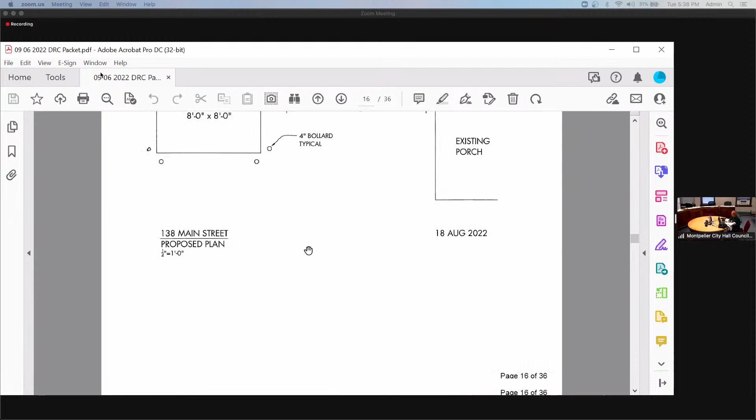So there you go. So where we had gotten the pellet silo permitted before was next to the existing porch. The street is off to the right of the building. This is at the back of the building, so the front of the building's to the right as well. And so this just kind of shields the silo better from the street. And it also actually makes it easier to use the access doors where the boiler is going to be. So can you go to the side elevation? Yeah, see the pellet silo was blocking those access doors. We made those a little bit larger. It's kind of immaterial, not much larger. So what was previously approved was the silo kind of below the shed and only half of the roof being raised.

Sandy, what will go in that space now? Cars park in there. It's really just paved area. Is it paved? Yeah, it's not a designated parking space.

And you're raising the full boiler shed roof now, right? Or not? Right, if you go back to the drawing below that in the handout. So now the whole, we had originally asked that the left side be left as is, which is about 18 inches lower.

The other thing that is noticeable is we were allowed to drop the silo down. So this silo is a good 4 feet lower than we had it before, which will also help mask it. Is there a pipe that goes underground? It's actually about a foot. It's at the bottom of that square, which is called the udder. Sorry, if you go back down, Meredith. Oh, here? Yeah, at the bottom of that, it goes left into the building, enters the building, and then rises up to the boiler level. It's a vacuum tube and a pellet tube.

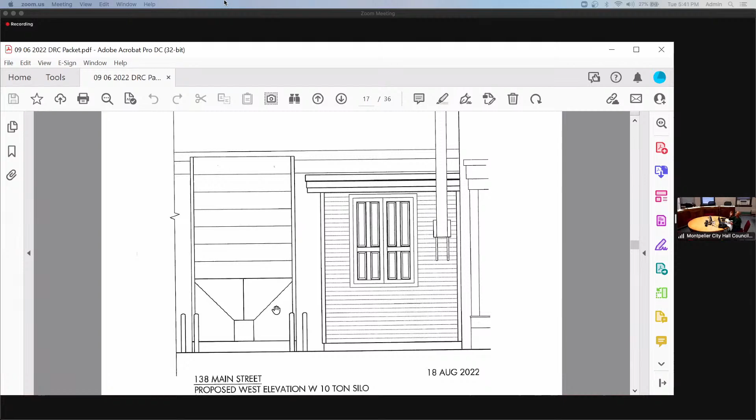But right where Meredith's hand is, even a little bit lower than that, that's about where the flood level is, right around the top of the bollards. So it was really no problem to let the silo be below flood level. Anyways, I'm not asking to drop it, but we are asking to move it to the back, and we're asking permission to raise the rest of that roof up. Yeah.

Yeah, if you had approved a taller silo and then they came in and said they could drop it, that's not something I would send back to you guys, because clearly it would be less noticeable if it's shorter. Right. But we have to redo, and we give them the site plan for moving the silo to the rear. Anyway, there's a different setback. And that was significant enough to bring it to you guys, and raising the whole boiler shed roof. I mean, there's other stuff going on here too anyway, so it made sense. Yeah.

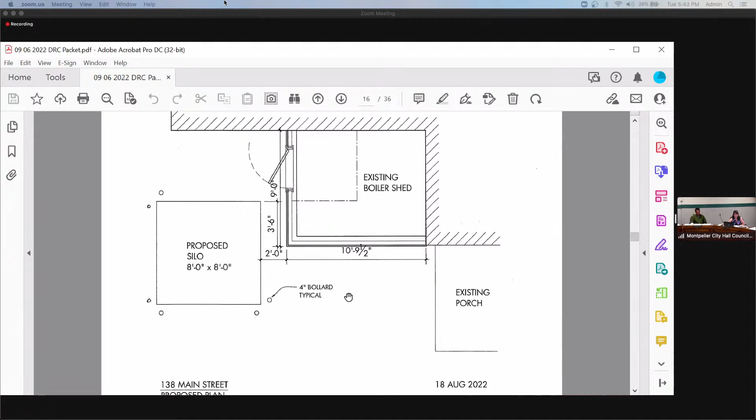And again, how much are you anticipating raising the shed roof? 18 inches. So it would have the exact same shape that it does now. It just would go up 18 inches. Originally, we were only asking to raise half of it, but it's still lower than everything else. It's still behind the main building completely. And it doesn't go up above the main building. Not at all. So on the right, on that drawing that's on the screen, you can see the adjacent porch. The porch is higher than the shed roof.

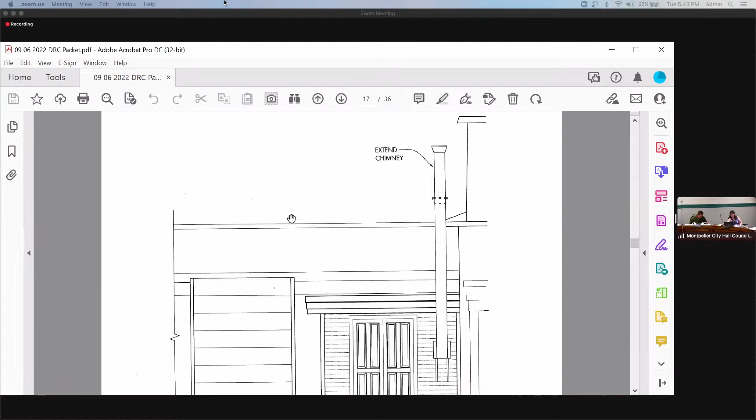Okay. And then where the hand is now is the top of the mansard roof, and the bottom of the mansard roof with a significant cornice is that one. Yeah, where the hand is now. And then there's the porch. So it's all well below the mass of the building. And this line back here is the rear sort of additions. Yeah, what we call the low mansard roof, which is still a one-story building. It's higher than the silo too. Yeah.

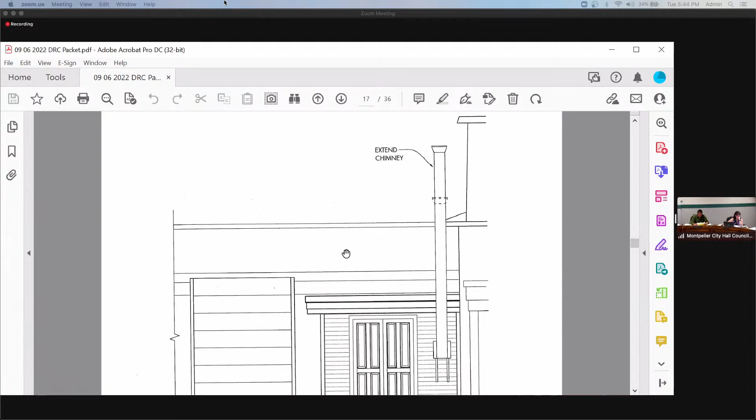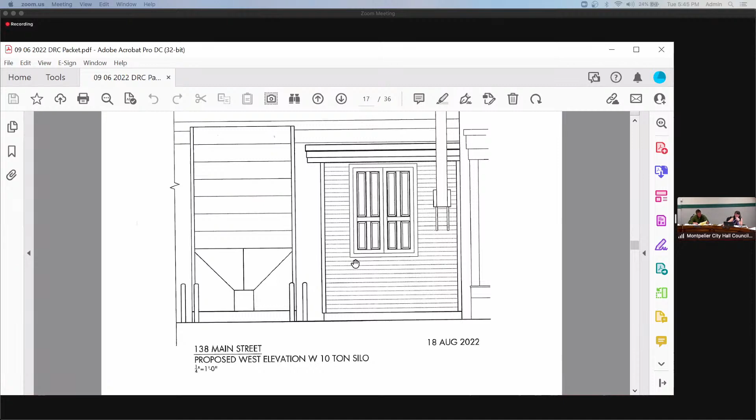Once I know what the next topic is, I'll scroll to it. It's the windows, but they may have questions or discussion about other parts. Anybody have any questions on the other portions of the silo and the shed? Okay. Next on the list is your windows. It is, and that's the biggest request for tonight.

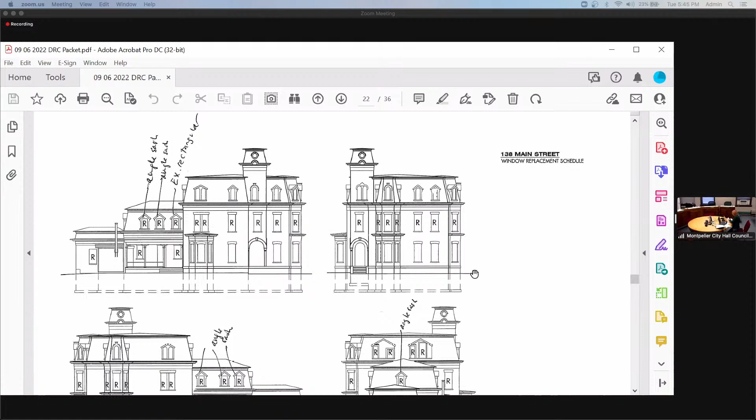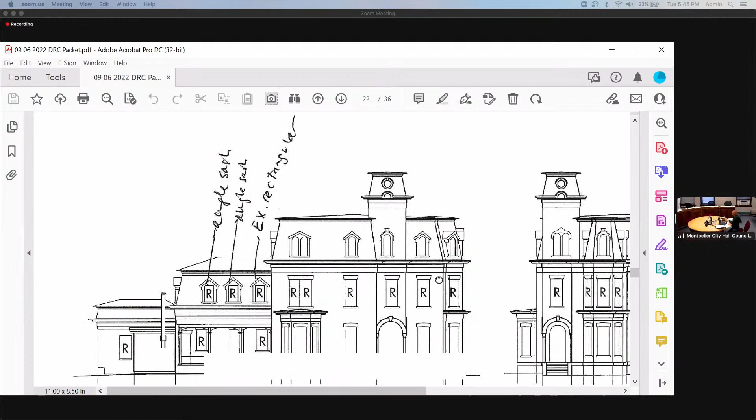So there are, how many windows? There's so many windows on this building. I think you said you're replacing something like 37. We're proposing to change out 37 of them, but those are the rectangular ones and ones in the back. I think there are more than 60 windows in the whole building, and there may be closer to 70 or 80. I have an inventory of them, but my papers got spread out, so I don't have them right now. But oh well. Anyways, you can see on the elevations that the attempt is to only replace windows that are rectangular and in the back of the building.

So the truly character-defining windows that have round tops and face the road and are visible from either angle as you approach the building, they would be restored. And we have a contract already started; we're in queue to get them restored. I think it'll be a 3-year plan, but we're already doing that. And they all have interior storms already, except for a couple on the back.

But the owner is making a concentrated effort to give back to the community where they can really have an impact. The rectangular windows we're able to replace pretty much in kind. We're suggesting using Ultrex for the outside, but it's a narrow profile, so it will look almost exactly like the original windows. And they were 1/1, so that's not an issue.

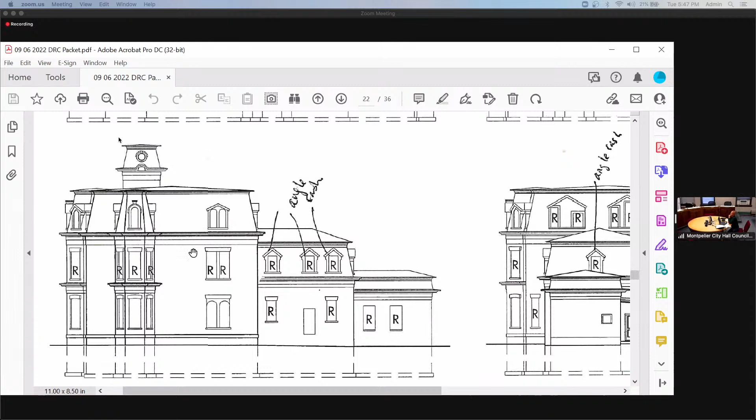So I'm just talking first because I think these are the most important windows on the front and the 2 public sides of the building. Those are the only ones that would be replaced, the ones with an R on them. So all of the first level are segmental arches, and the upper ones are actually semicircles, semi-arched windows. Those would all be restored. At the back, those are basically impossible to see from the public realm.

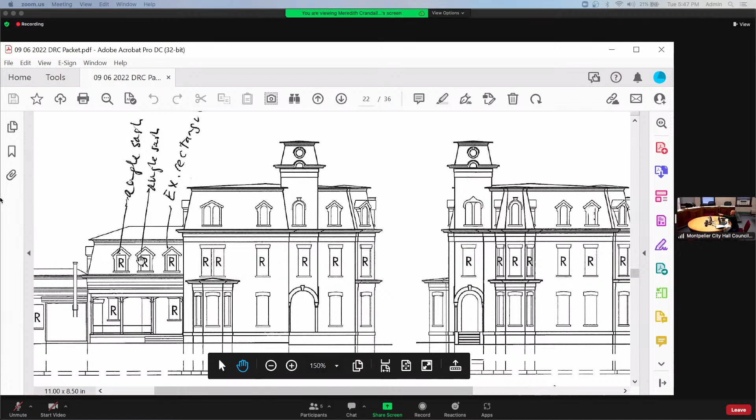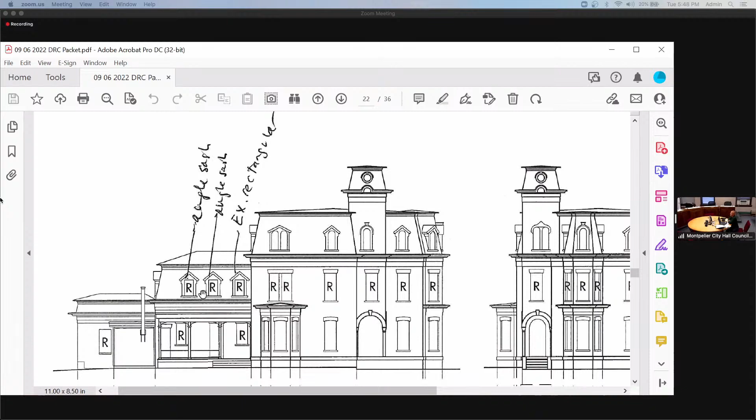So your packet does have a photo from the inside of one of these angle tops. There's, let's see, 1, 2. There are 2 on the rear, and then 3 on that side. So it's a total of 6. 6 are angle top now, but the rest are all rectangular. And the picture that you're looking for, this one is the second floor window, yeah, that one. It gives you an idea of how bad the condition is of the windows. That's from the inside. You can't even see the hole in the window. The glass has a hole this big in it.

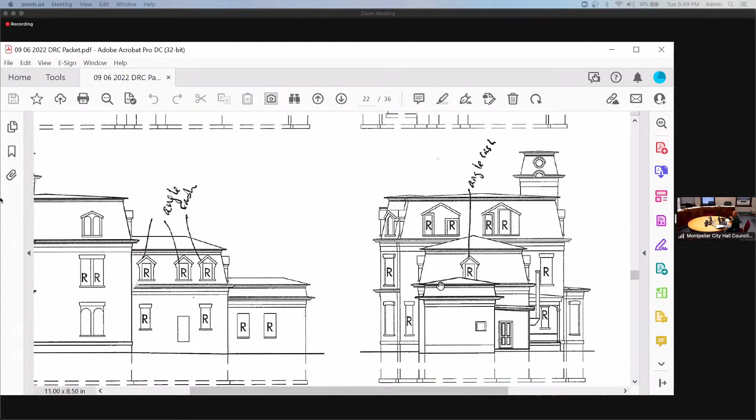So most of those windows have outside storms, which are already rectangular topped. They've been that way for probably 40 years. And the idea would be just to take the storms off and fill in discreetly, following the example of the one that was always built as a rectangular. Can you go back to the west side, Meredith? Yep, where the porch is. So that window right there is a bathroom window, and it was always a rectangular window. From the inside, it's a flat dormer ceiling. And it's clear, if you look carefully at the outside, that it was always rectangular. So we would copy that one around the back of the building and just fill in the triangle with the rectangles. Again, you can't see it from School Street.

On the back is the river, and on the east side of the building is a big tree. So you can't see them from anywhere. Fill in the triangle with what? Wood trim, to look like a wood panel. You could even leave it recessed when you replace the other window, against the stops. You could put a wood panel against the stops where the glass was and then insulate it on the interior.

The bathroom one that is existing has a horizontal piece of black trim that matches the two coming down. And then the triangle, that's the tympanum, this one, right? Yes, that's the picture. The tympanum is painted green, not the same, and you can see the recess up there. You can just see the small corner of the recessed panel. And that's what we're planning to do, so we're all on the same page there.

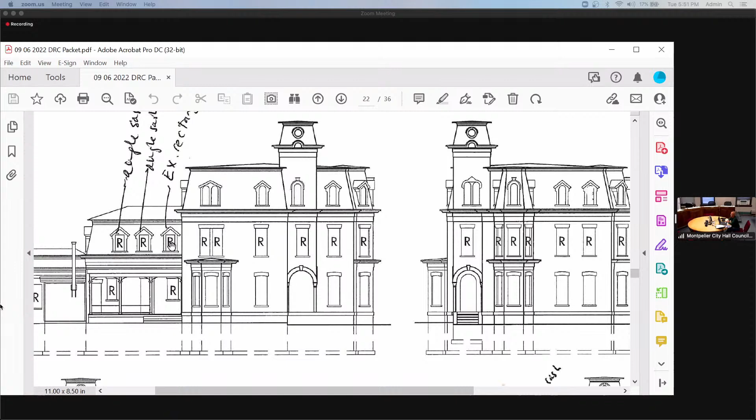But it's just prohibitively expensive to replace them with angle top pieces. And those windows need to be operable. They shouldn't just be fixed. So for a lot of reasons, it made sense to try to replace them.

If I could go on, if you go to the back, do you mind scrolling down, Meredith? Yep, I'm just gonna stop share for a second so I can scroll a little faster. And I'll share again. Which page do you want me to go to? You were on it, actually. Oh, sorry, I thought you went to another page. It's all right. Let me go back. It would give people vertigo if you scroll too quickly.

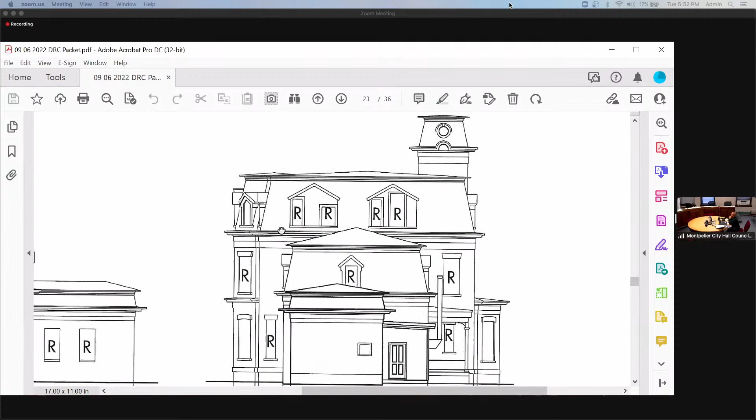So if you go down just a little to the next row of drawings, there's the back of the building, and see on the third floor, there are the three windows, and the far right one is a tiny door. So those windows, both the historic preservation consultant and I believe are not original to the building. We actually don't even think those dormers are original to the building. We don't know where they came from, but you can see in this picture that they are very random.

And one of them has muntins in it. It seemed like they used salvage when they made those windows. They are crazy inefficient, just shaking. One doesn't even have a storm. Basically, they have socks trying to shim them, hold them tight. And then the far right on the third floor is a door that is very small. It's like 2 feet by 6 foot something. It's 2 lights wide and 5 high, but we could replace it with just a single light. That seemed to be better. Again, we don't think it's original. None of the hardware on the door matches the rest of the hardware in the building.

Was the door meant to be an egress? It can't be an egress because it's only 2 feet wide. It would count as an egress window, but not an egress door. Is there an additional egress from the third floor? Well, that's why the whole sprinkler issue is in a separate department right now. Basically, the building cannot get a fire escape, so there's no way to do it. So, suffice it to say, it's not an egress door, but the idea is to improve it so it actually is airtight and can continue to be used. It's used now, as there's a little roof deck up there that's not shown that the tenant has access to.

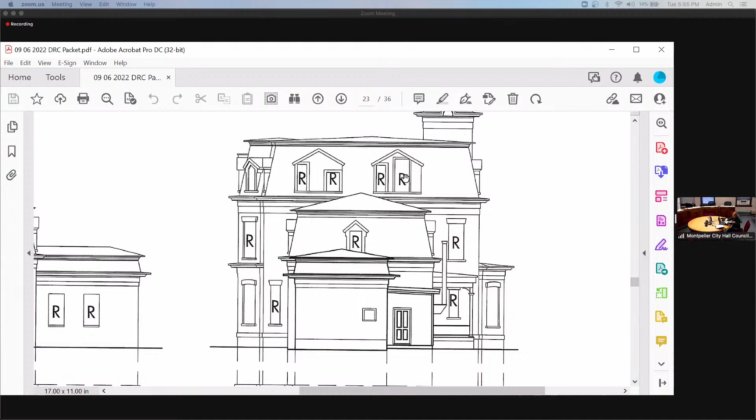I didn't know if, rather than do a 1/1 double hung, you could do a casement window. Oh, it's actually a door with hinges and doorknob. It's 2 feet wide and 6 foot something tall. Oh, okay. Now you're going to replace that with a window? No, replace it with another door. We just got a custom door ordered. Okay. So that was the door referred to as the 37 windows plus one door. And I'm just trying to figure out exactly the size; it's a tiny, tiny door. Does the replacement door have glass in it? Yeah, it would be a single light door. Basically full glass, single light. Kind of in keeping with the rest of the windows up there, that would be 1/1s.

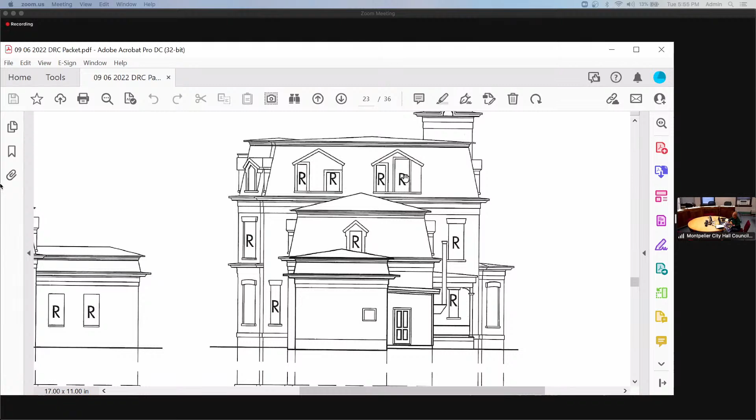And I'm sorry I don't have a better picture of it, but it is that hard to find. You can't get to it. You can't see it from the ground. Hold on one second. But if you go back up, you can see the balcony. Yep. And that's where the door is, but you can see how it's basically impossible to see it. And that balcony doesn't go to a set of stairs? No, it doesn't. It's just a deck. It's not an egress.

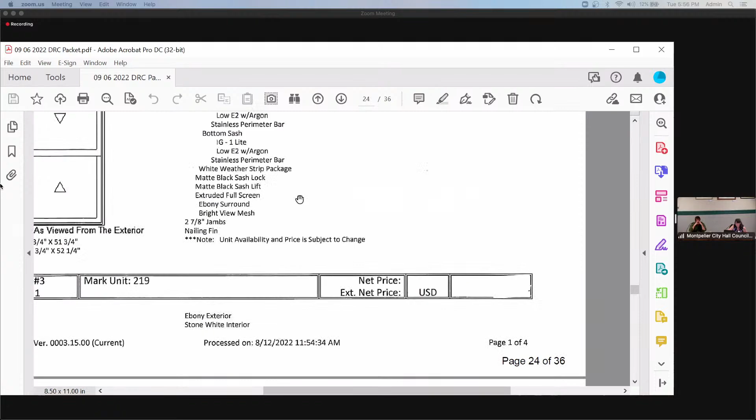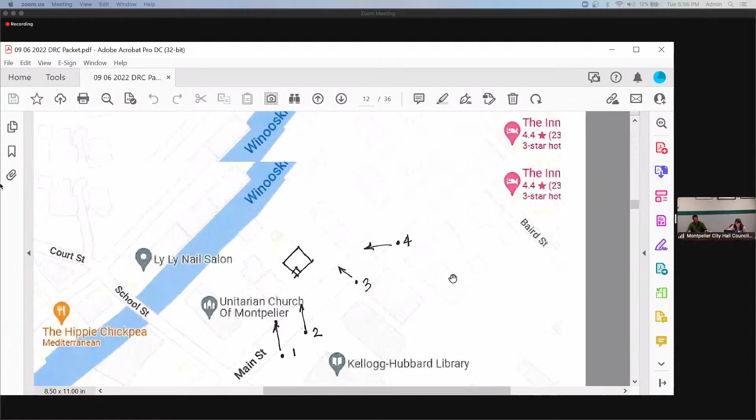Well, Audra had put in, when we were looking at the chimneys further up, a Google Street View from Cliff Street. Yeah, I can see it. It's on the right there. That's it. But that's the kind of view you get from Cliff Street. It's the only place I think you can see it. Right. Or from maybe a rooftop over here, where they have solar panels. And then it's important to zoom out because your view isn't focused on that one object. You're looking at the whole cityscape. Yeah, actually the ladder is up. Do you see the ladder? That's the only way to get up there.

So, I'm happy to answer any questions about those windows. One of your diagrams here shows windows in the porch area. Are you anticipating changing those now? Do you mind going back to the elevations of the building? I think they're the most useful.

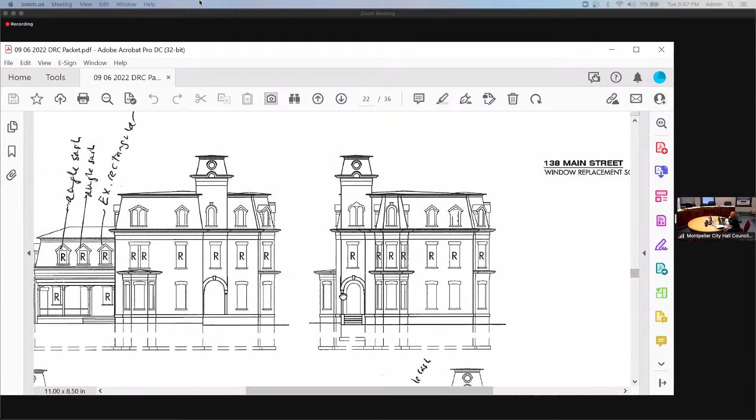Anything with an R on it, we're asking for permission to replace. Okay. So those side porch windows? Yep, those are the ones I'm talking about. That's on the first floor in the back of the building, and those are ones that are already rectangles? Yes. That are just gonna be switched out with better rectangles. Yep, correct.

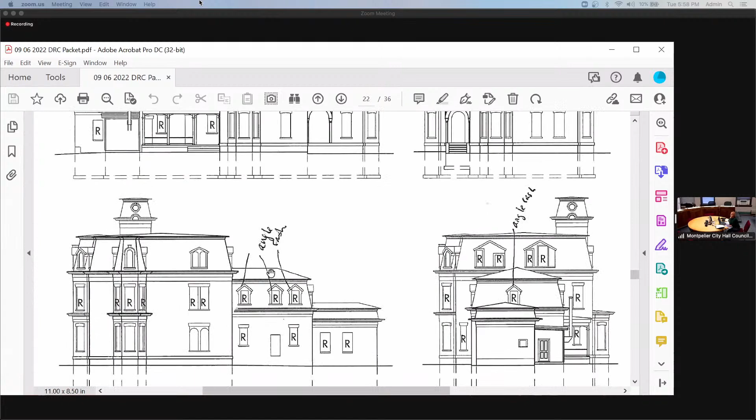Well, one of them looks like it is shaped. That one has a modern exterior storm on it. And what you're seeing is the much later applied exterior storm. The window itself is rectangular. I have no idea why they put that exterior storm on. Maybe they had it from a different window. It's really bizarre, and there are no other storms that look like that on the building.

There was probably one kicking around in the basement from somewhere else and they just honestly used it. It doesn't fit, it doesn't work, it doesn't close. They just used whatever they could find at the moment. Yeah, not functional.

I see on your window descriptions here that at the bottom it says a nailing fin, which indicates to me that it's being put in from the exterior. Yeah, I would have to refer to the contractor who's doing this, but I think they're going to be ripping off the nailing fins so that they can get a full tight fit up against the jambs and then sealing. Could the description be because they make the window without a nailing fin? Well, I asked if we could order it without it and I was told you just break them off, because evidently these come only with the fin on. Oh, okay.

I was trying to avoid the glass size being reduced. It was very important to try to keep the glass size the same. So they're not taking out all of the jambs, but they're going right to them. And this is a replacement unit, so it's pretty thin. So it's not changing the glass size. Yeah, they only give you like a quarter of an inch in dimension because they want an eighth of an inch on all sides, depending on how square the opening is. That's right. And you have to just hope for squareness. And we've actually measured each opening like 3 times to make sure that things will fit.

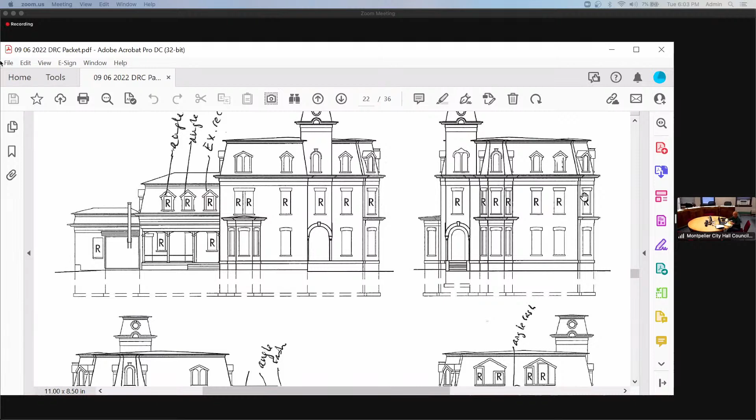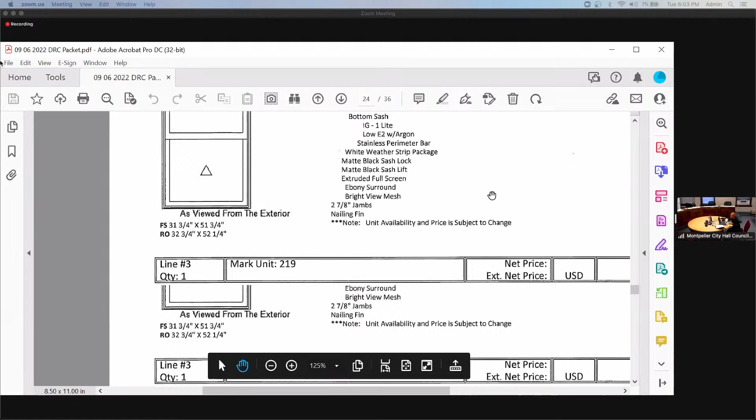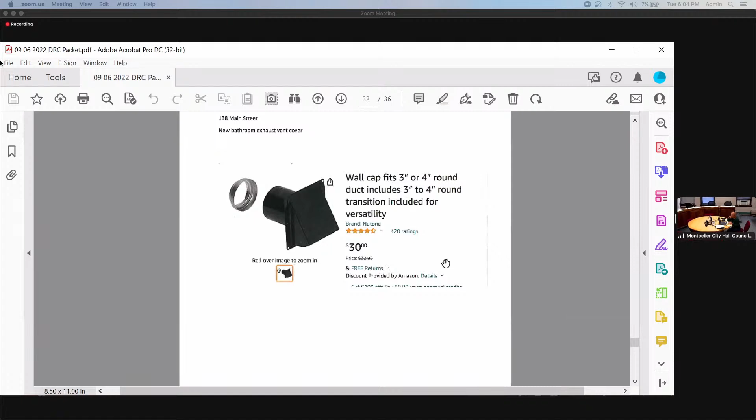It's as high up as I could get it without getting it into the trim. It seemed to me the best compromise on the outside of the building. It could go right up against the soffit, but then it would be disturbing the brickwork, which seems to me an important defining character. So I'm suggesting dropping it down a little bit to where the hand is on the drawing. And this is on the photograph.

In the side headed north, right? It's what we're calling the east side. Right below this arrow is where the meters are. This is a great picture, this one that I'd given earlier for the windows. It's way up there. Where we had originally talked about putting the condenser here on the wall. And the meters, you can't see behind the bay, but it's just up there. And this is not certain, but we're trying to pave the way in case it does happen. I'm trying not to come back multiple times, although this is my third visit.

Do you have any left adjustment in that, so that it might be more centered in the wall? It's really a question of where it is in the joists. Maybe we have to lower that ceiling in there, but I hate to, because then it will have to have another sprinkler, but we'll see. If that's important, we definitely encourage it. I trust you to do the right thing. As much as you can, is there an opportunity to tuck it into that band? So try to make it go towards the bay window. I think so. Fair. Any other questions on the vent?

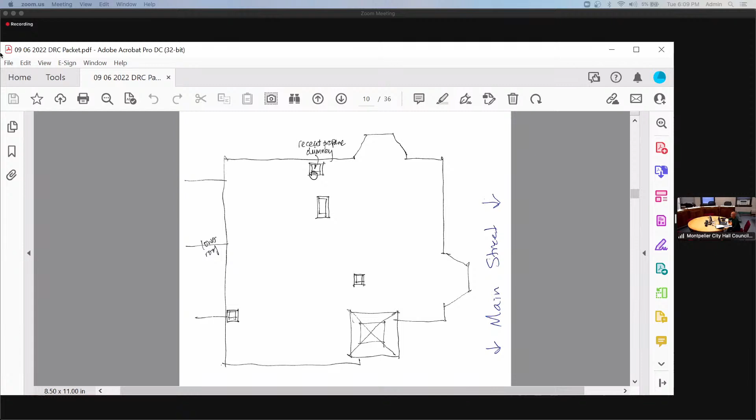the way I feel about it is I really looked hard walking from the library towards 138, towards the roundabout. You can only see one or two on the west side, the ones in good condition, for not more than really like 30 feet. There's a very small space. I did a diagram where you can see them. Walking the other direction, you can see I did that chart. Yep. And then walking in the other direction from the roundabout towards the cemetery, you can see that there's nothing visible, and it's absorbed in the roof.

So I mean, they had lasers on this back in June. So I'm just not sure why we found it out today. The good news is we found it out today before it actually went in. But because I've talked to you about it being removable, I didn't feel comfortable not bringing this to your attention. And I said, oh my gosh, I'm meeting with him tonight. I don't need to bring it to you as an emergency that needs a decision tonight. I just wanted to notify you about it.

And again, we can put off installing it and wait till the right decision is found. But the pieces are all fabricated for it to be removable. So I don't know what to do. I mean, we have to amend that permit. That would have to be an amendment to come back officially. Because it's in the record, having that as a condition that it's removable and it's only up during certain months of the year. And I know that was an important part of our discussion.

Right. I don't feel comfortable making any decision at all today on that one. Yeah, I wouldn't feel comfortable asking you to. Sounds like, I don't know when the next deadline is, but I should just submit this as a formal request for reconsideration. Yeah, it's going to have to be an amendment to the permit that has to come through the DRC, because that's not something I can do. Is that okay with the group if I submit that? Sure. Yep. Would it be a request for reconsideration? Amendment.